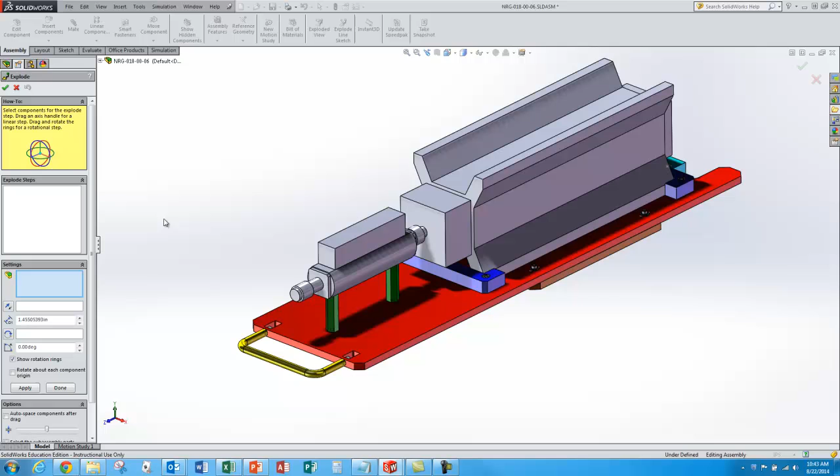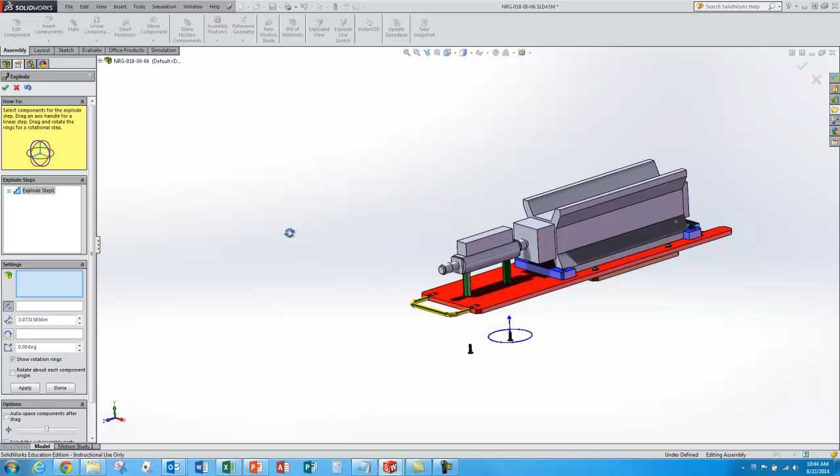We get some nice instructions in the left panel. What we want to do in general is select these parts and then pull this triad to move the components in the direction you want them to go. We'll start by pulling these fasteners down about 3 inches. Every time we let go, it's ready for another set of parts to be exploded. As we do this, we need to think about moving things in reverse order, and at the end you'll see that order reflects my decisions here.

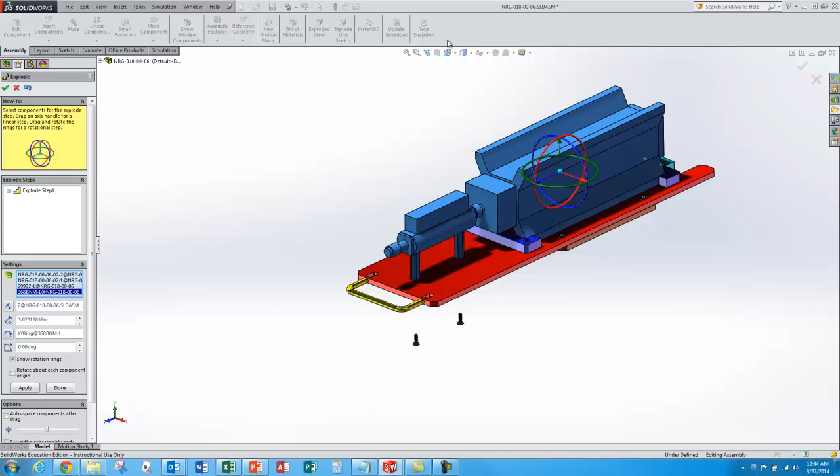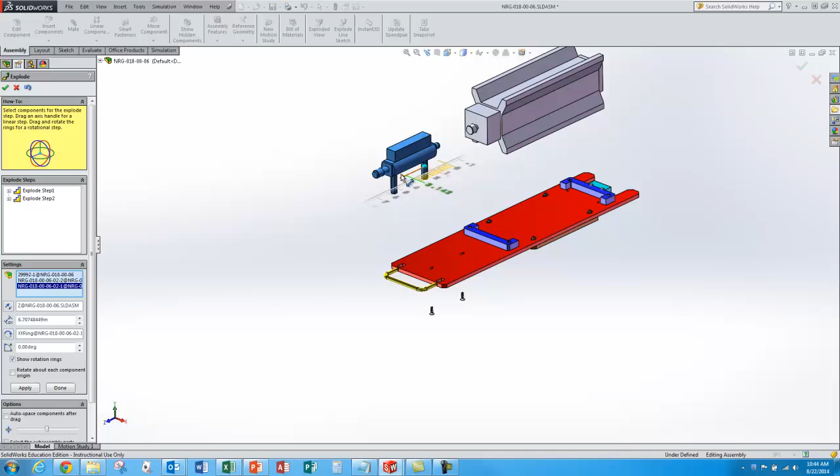So I'm going to select 4 parts. I can select them and it populates them in the tree. On the last part, I pull the triad in the direction I want to go - I pull these up about 6 inches, then continue selecting a new set: these 3, 2 standoffs and an RF component, and pull them forward maybe 3 inches. Then the 2 standoffs I'll pull back down, say 3 inches.

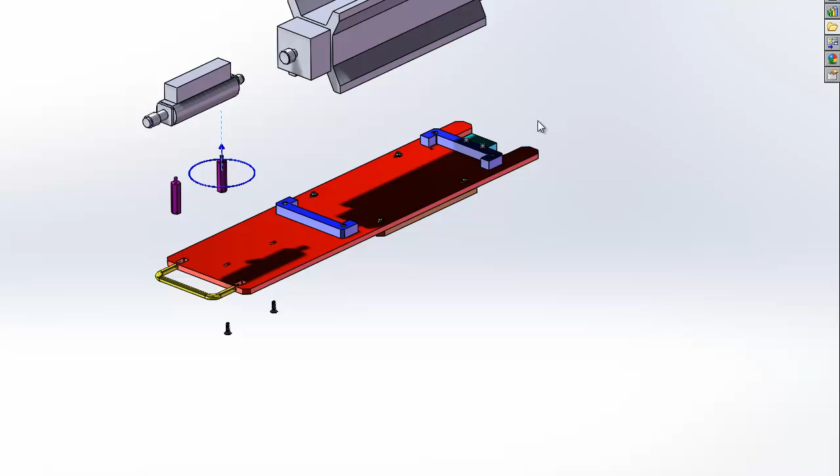Continuing on with the screws that hold the handle on, I'll grab these 4 items: fastener, washer, fastener, washer. So I've got 4 parts there, and I want to pull them back about 1/2 inch.

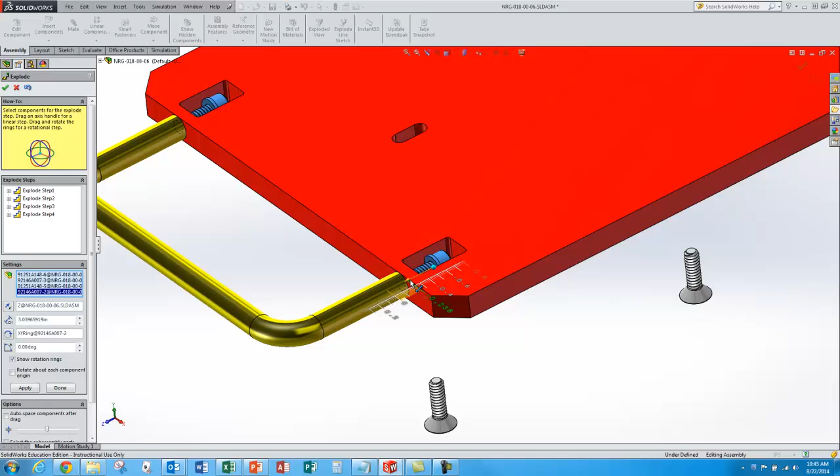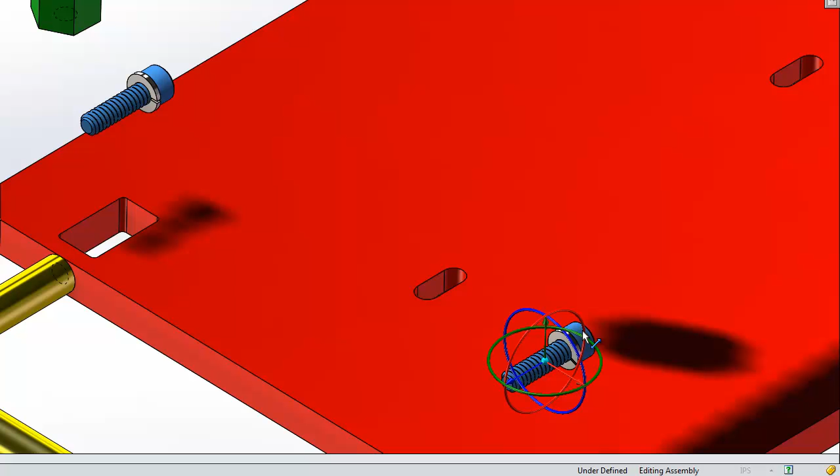I'm going to select them again and pull them up maybe 1 inch. Then select the 2 fasteners for the last move and pull them forward about 1 inch. Now I'll pull the handle forward - select it and pull it a couple inches.

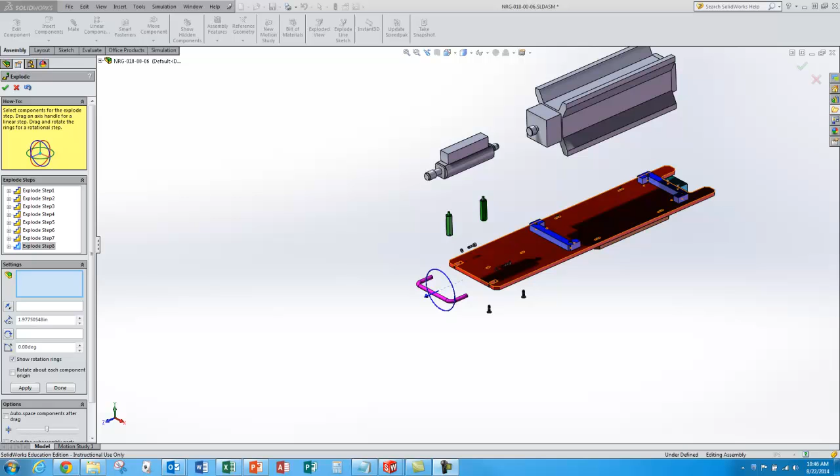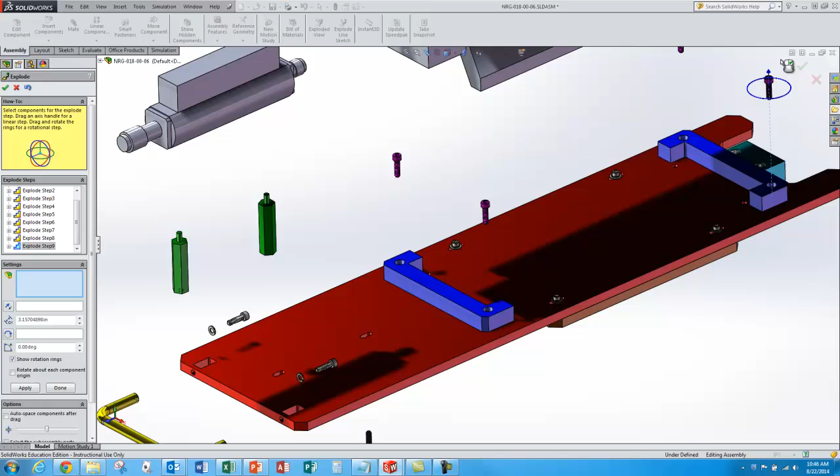Now I'm ready for these capture blocks. I'll pull the fasteners up first - 1, 2, 3, 4. If I select the wrong part, I can right-click and remove it in the tree. I'll pull these up, say 3 inches. Now I'll pull the blocks up a couple inches.

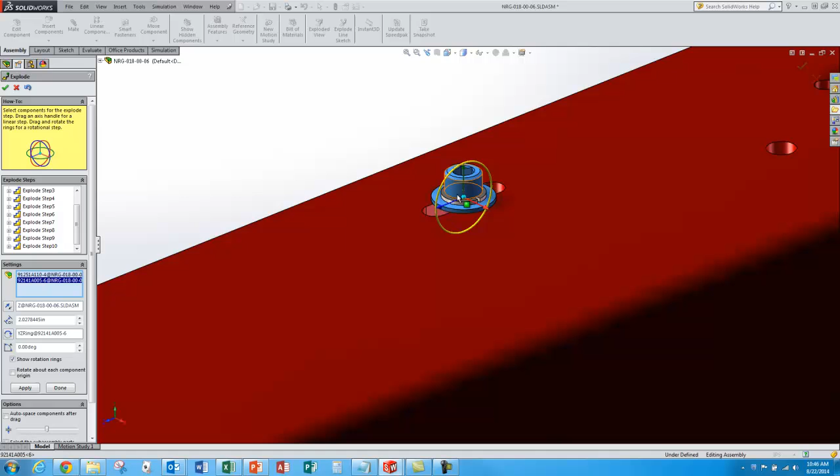Now I'll move to this lower plate. First thing I'll do is pull these fasteners up. Got a fastener, a flat, and a split lock washer. I'll select all 4 pairs of those 3 parts for a total of 12. There we go, so I'll pull these up 1 inch or so.

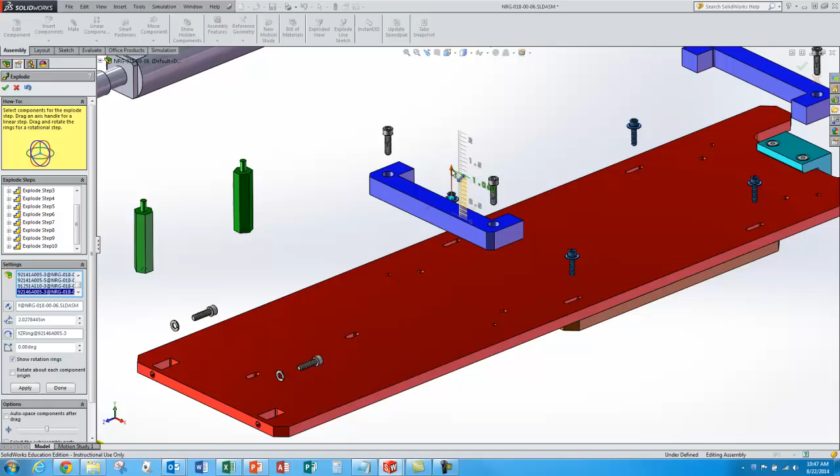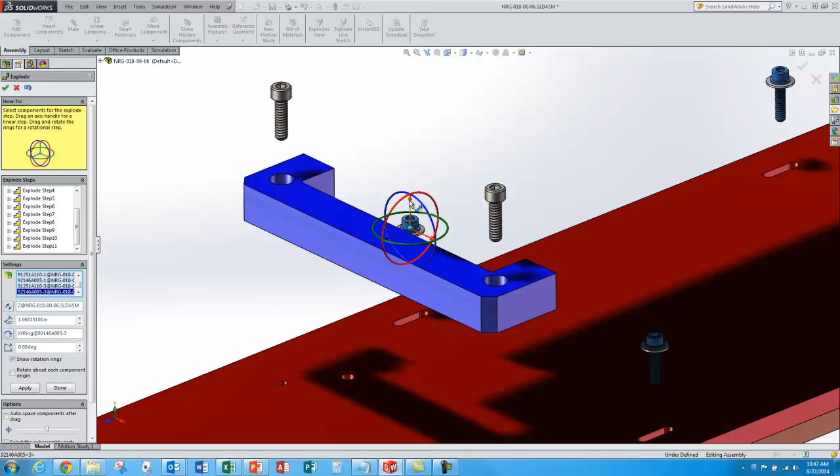Then I'll continue by pulling just this fastener and the split lock washer, those 8 components. Pull those up another inch or so. Then lastly, just pull the 4 fasteners up another inch or so.

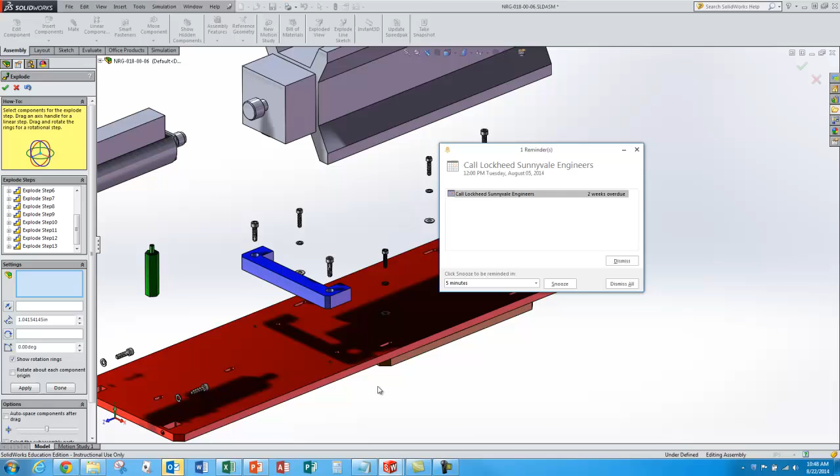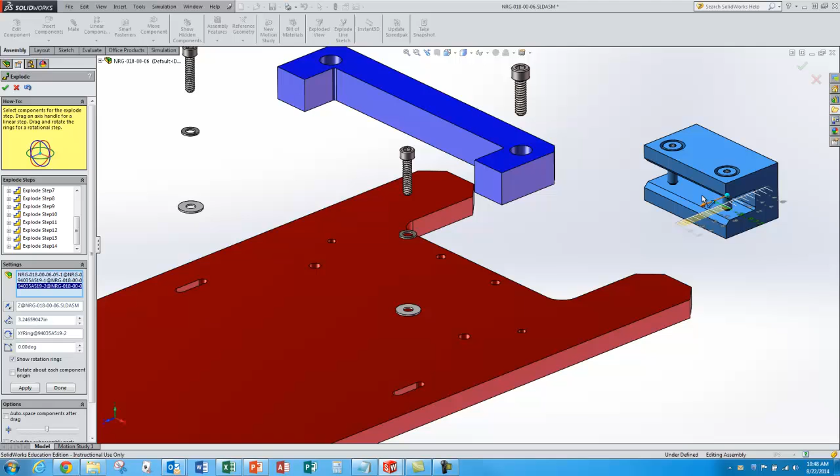Now I'll pull this plate down. Whoops, got one I didn't want there, so I just right-click on it and say delete. Now I've just got my one plate - pull it down, say 3 inches. Then lastly, I'll pull this block and these 2 fasteners back about 4 inches, and the 2 fasteners by themselves I'll pull up 1.5 inches or so.

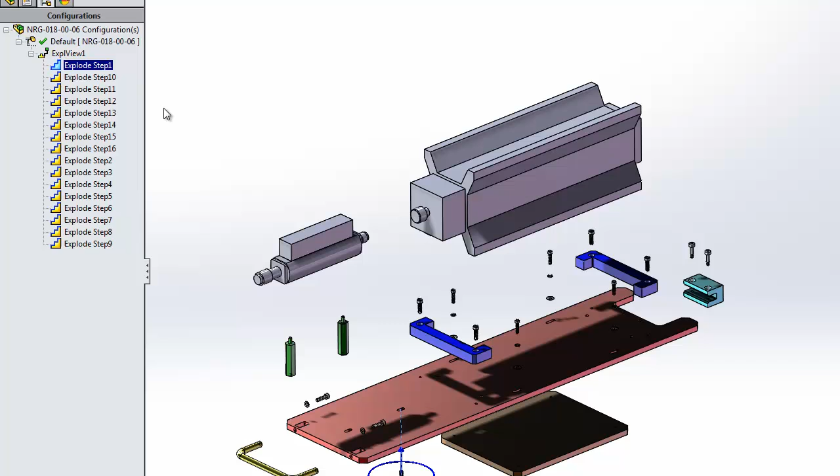Once I'm done here, I just accept. Now inside my default configuration, I've got this exploded view with all the steps. I can edit these steps individually - right-click, Edit Feature - and go in and change the parts that were exploded, and/or the distance I exploded it.

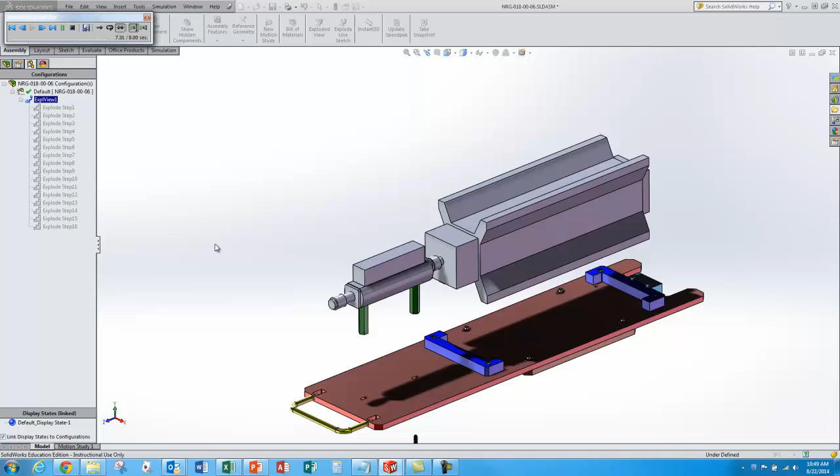Now that I've got it all exploded, I can do some other interesting stuff. I can select the exploded view, right-click, and animate it. You get a little animation of the assembly going together, and you have several options - you can do one direction, you can loop the playback, and you can change the speed - speed it up or slow it down - or do this reciprocate option, where it puts it together and takes it apart. It's a kind of nice visual.

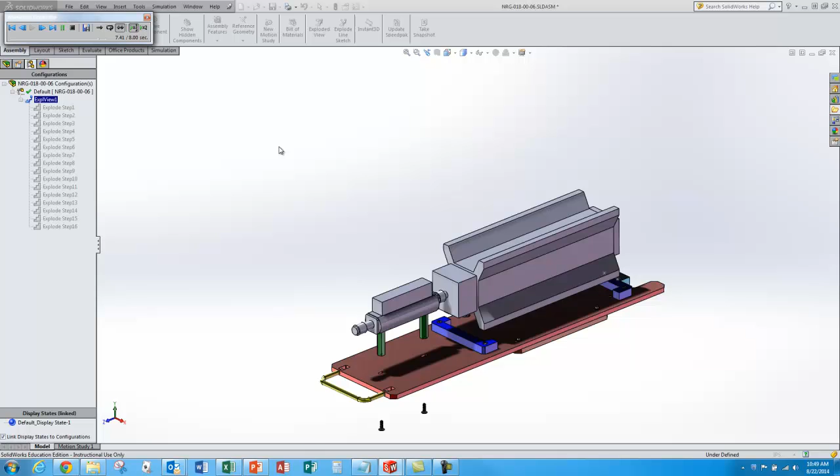You can also save these animations as AVI files if you like. So that should take care of our most recent tutorial showing how to do exploded views. Stay tuned in the future for additional SolidWorks, Inventor and Pro E tutorials from Summers Technical Services.